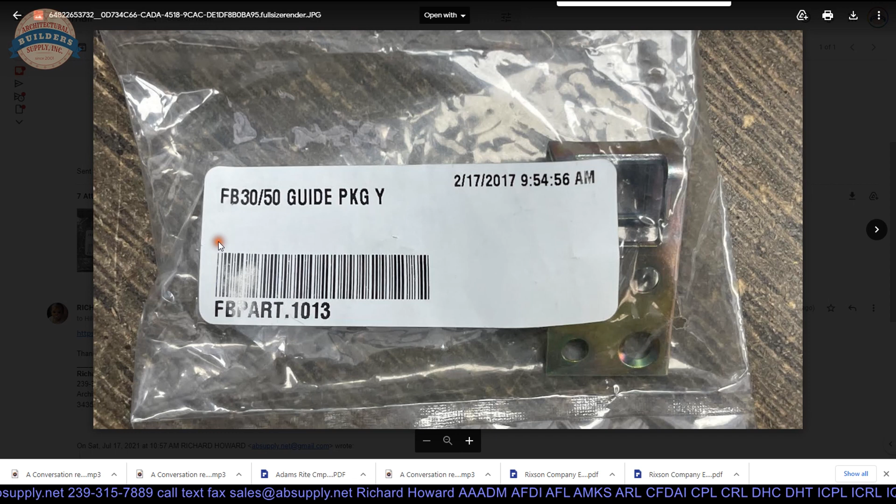There's the package, that's what's in the package, some sort of corrosion-resistant coating or plating over steel.

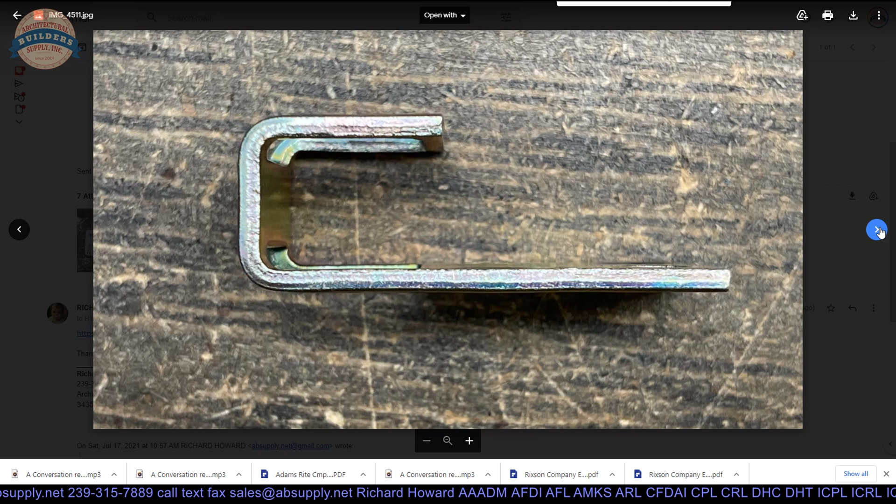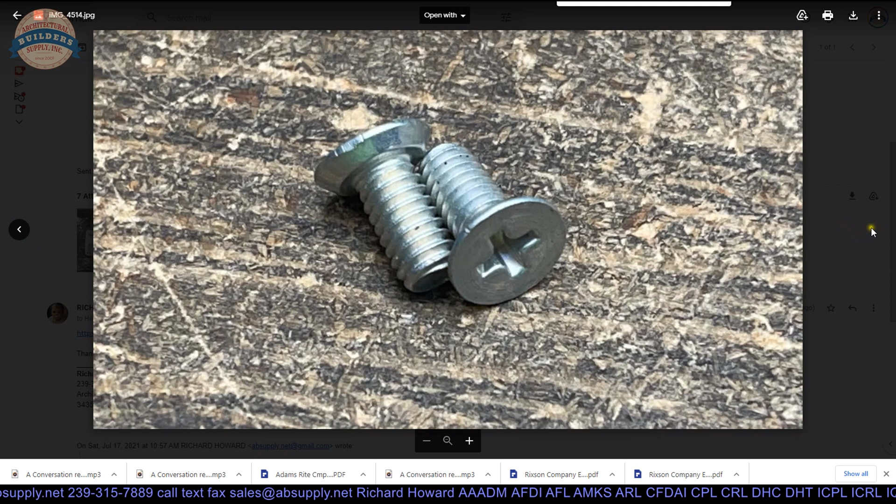Here's a different perspective showing this. You'll note that it's countersunk on one side, and on the other side it's countersunk as well. Again, you can install it in either orientation, and a couple of screws are included.

Not much to see in the extended description except that it's used for the FB30 and FB50 series flush bolts, and it's considered the guide package. The question becomes, what are those bolts?

We can take a look at that when we click on the link below this video to the manufacturer's page, where we can see all of the IVES products we sell via horizontal navigation, as well as a link to the website and the catalog. Let's open up the catalog.

We're dealing with the FB30 and FB50. I don't recall the difference between the two. You could have semi-automatic and automatic. Let's take a look at FB30. Bear with me. Right, so it's the 30 and 50 series.

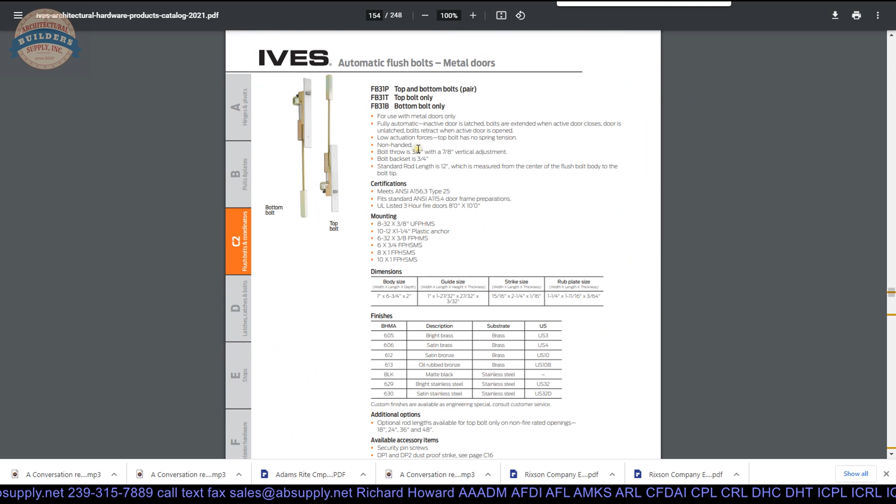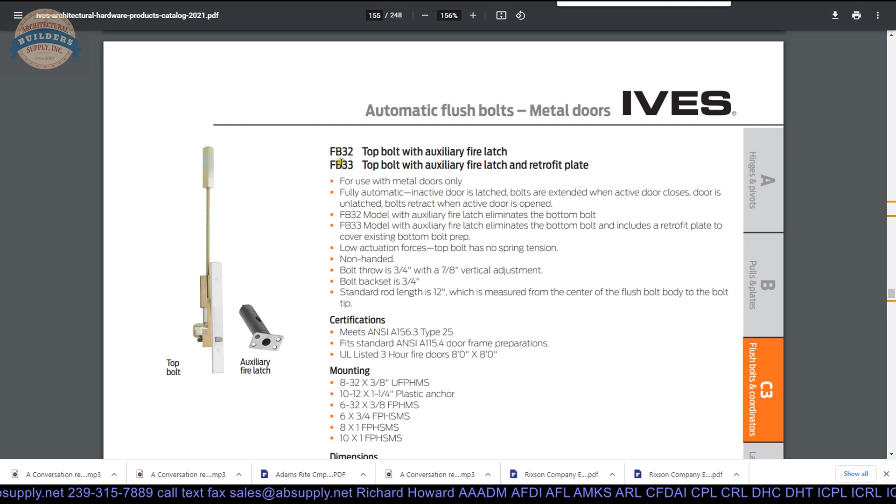Let's get down here and take a look. The FB30 series are automatic flush bolts, and you'll need those guides for the top and bottom of the door. An FB32 is a different derivative, having an auxiliary fire latch. Then your FB40s, you won't need that, since that's for wood doors.

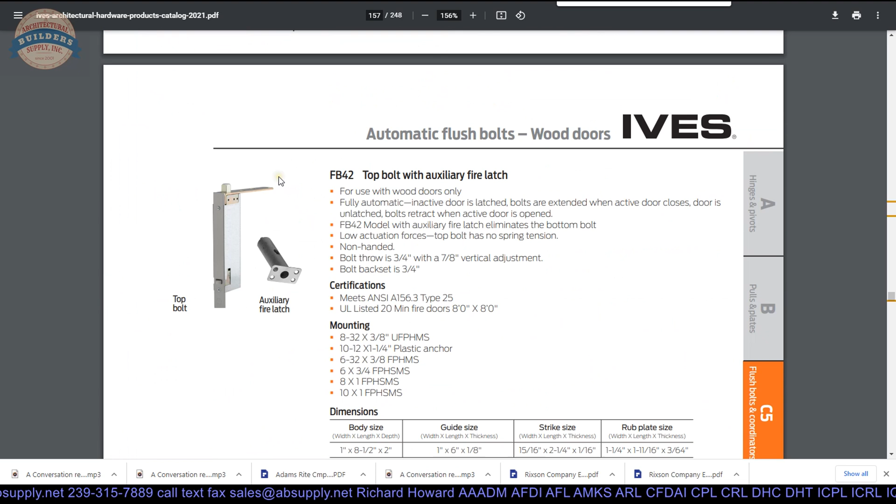FB50, these are what's called constant latching, where it's always latched. The top of the door is always latched.

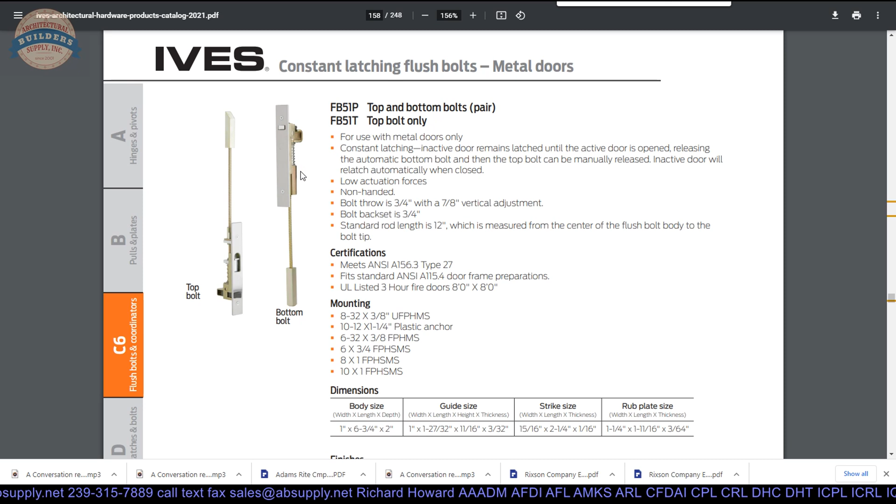Except that you can obviously pull that trigger down and pull it open, which is different from the FB30 series, because the bottom bolt seen here would be part of the FB30, which means every time the active door is open, your inactive door is not bolted anymore. That may not be what you want.

So that's what that's used for. And there you go. Since we're on the manufacturer's page, you've got the full line catalog here that we just opened. You can also take a look at some really old IVES catalogs. They did not make constant latching or automatic flush bolts 120 years ago, but we do have a couple of old catalogs there.

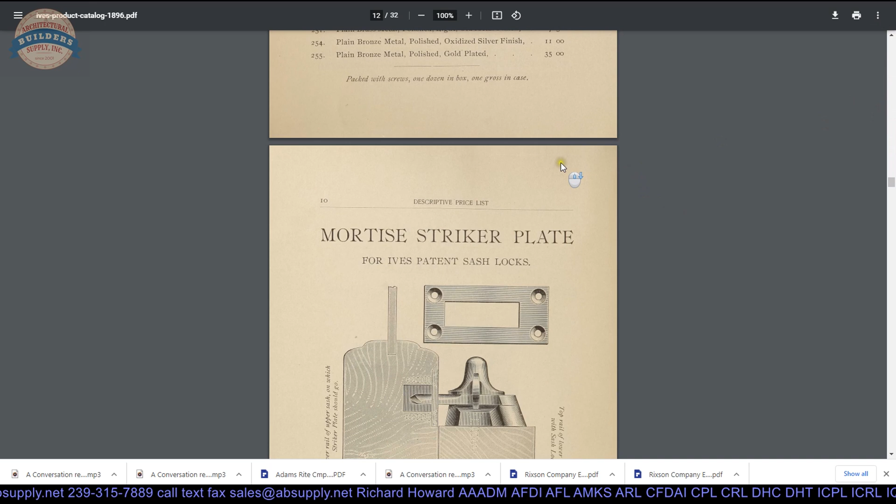IVES was known, and I think still is to perhaps some old timers, a company that still does make sash hardware—locks and lifts for double hung windows. IVES didn't have just a couple of choices; they had a catalog full of choices of this stuff. It's just the bottom line: lots of door hardware, sash locks, sash locks, sash locks, sash locks, and it just goes on and on.

One very interesting concept that they have here, one that I actually like a lot. Can't think of a manufacturer who is doing it, but when we study this old page, you see this one sash lock.

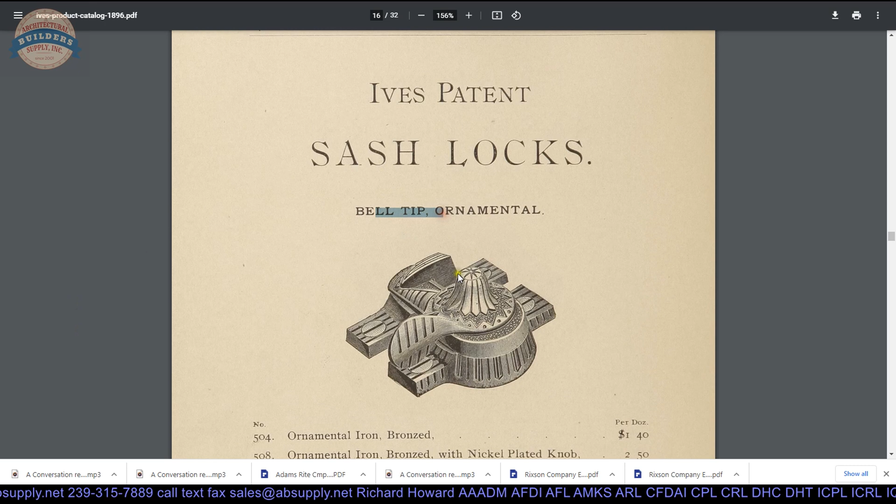Let's just say that this is bell tip ornamental, a 500 series, whatever—504 through 530. What's the difference? Well, the finish; the base material and the finish is the difference. So they use a different part number when the finish changes. Ornamental iron bronzed, you can also get it with a nickel-plated knob, so they go from a 504 to a 508.

$2.50 for a dozen of those solid brass pieces of hardware. How'd you like a skid of those today? So that's an interesting thing—they used a different part number for every finish.

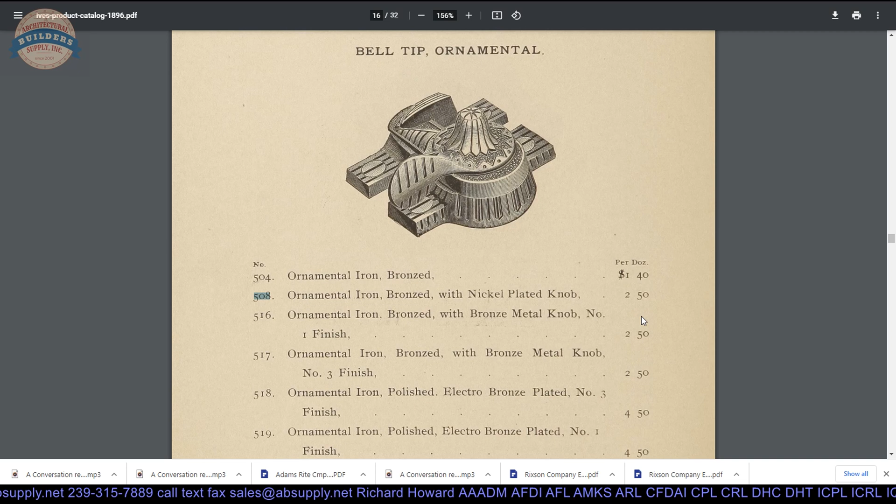That's not the case today. This would be used on an FB31, let's say this guide, and then you specify the finish, but it's always an FB31. In fact, I think it's nice to be specific with a part number because it tells us the finish, but it's also nice to not have to memorize 9 different part numbers for the same item. So this should be a 500 by finish, would be my thing.

Now, the reason they probably did that is, in the second part of what I'd like to say, a unified system for naming finishes did not exist till the early 1930s. There are no US numbers here, there are no BHMA numbers here.

So the question is, did you mean iron bronzed nickel-plated knob, or did you mean iron bronzed bronze metal knob? Or did you mean with a number 1 finish, or a iron bronzed bronze metal knob with a number 3 finish?

You could order something, a 500 series sash lock, and then specify the finish incorrectly. But when you're using a different part number for every single finish, that does help. It compensates for the lack—it helps for eliminating mistakes, reducing them, but it compensates for the fact that there was no US system in effect in 1896. So there you go.

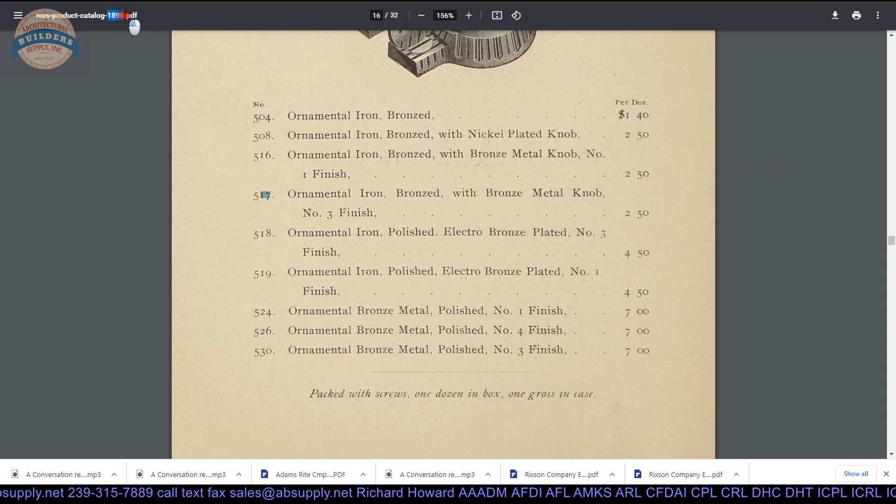All right, let's wrap up this video on camera. History lesson over. Thank you.